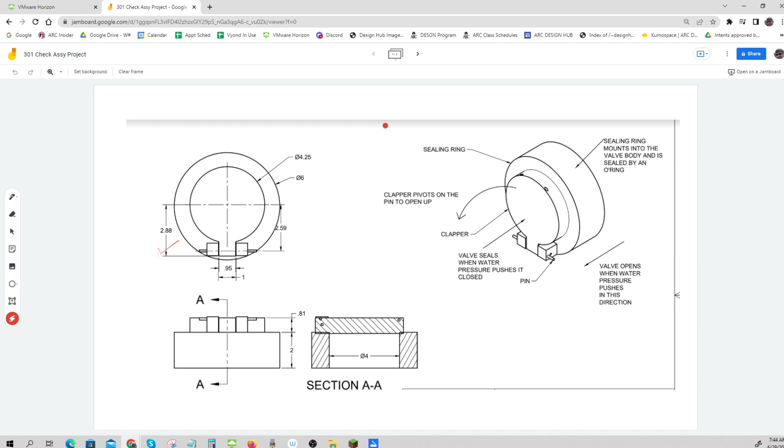And remember, I've got the height, I've got the diameter, I have how wide the rectangle is, how far it extends. So I'm going to use this information to make my drawing. So here we are. I'm all set up correctly, and I need to make a layer called clapper. So let's do that.

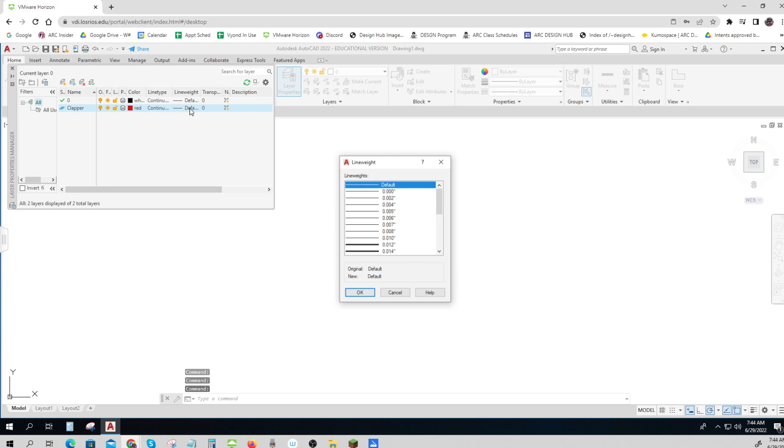Clapper says it's red and 0.014. So I've done all my work. Remember, to get these to show up in inches, I had to right click on my line weights, click on the settings, and make sure it says inches. So now I'm ready to draw my clapper.

Now it could be, let me go ahead and get a few more things that might be useful. Let me go find my mechanical exemplar. There we go. And now I can come back to my drawing and

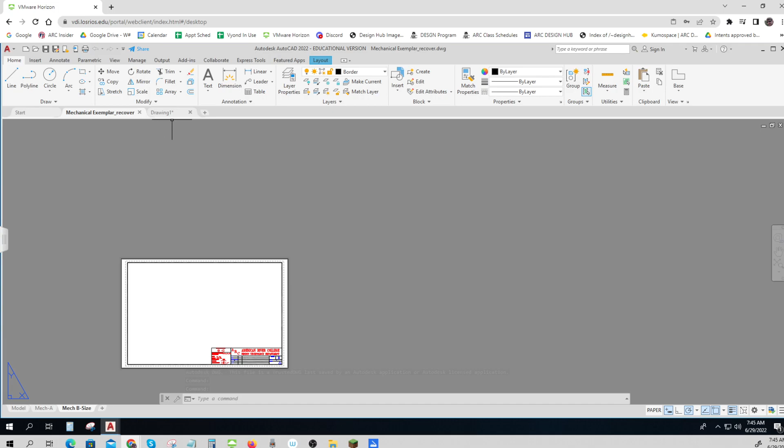probably need to save this now as clapper 4-inch. File, save as, clapper 4-inch. That's going to be in my week 5 stuff, mechanical, clapper 4-inch. And I did a 3D model of it, so I'm going to call this my 2D model.

Okay. So I remember that from the design center, if I look at my open drawings from my exemplar, I can get some other layers. And I probably want center lines, construction lines, Defpoints. Let me just get the whole thing. It's not going to hurt me at all to bring all of those in. Now I have them all available for me to draw with. That's why we use that thing. They're all right there. All of the layers are there for me.

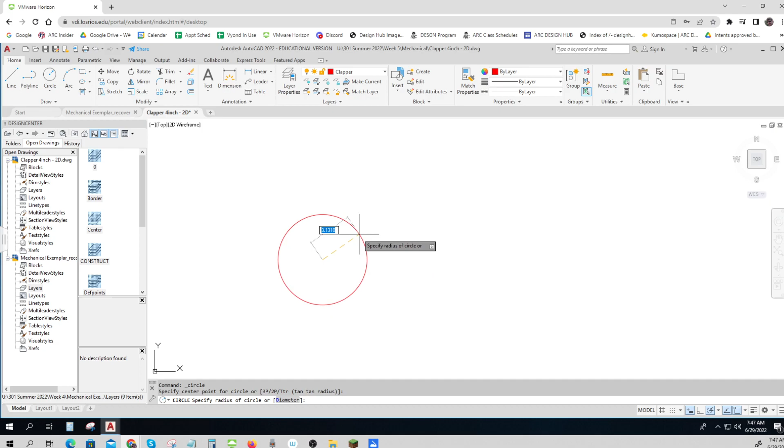So I also have my clapper, and let me start out. The main diameter is 4.25. 4.25. And then there's a rectangle of some size that's 0.95 wide, and I'm just going to make it fairly long. I'll make it like 2 long and see if that will go into place.

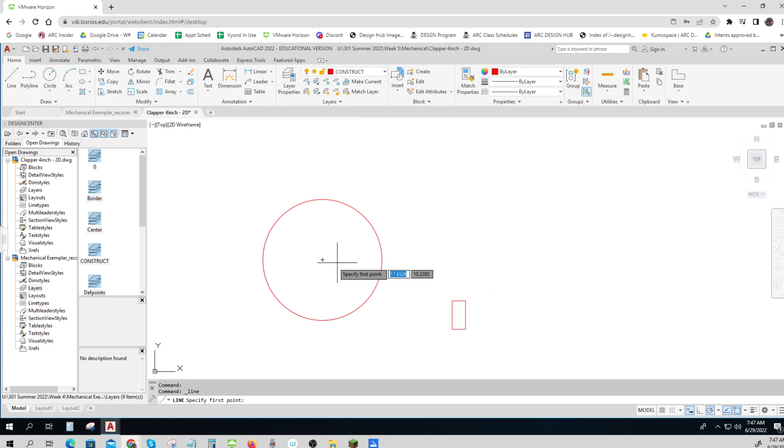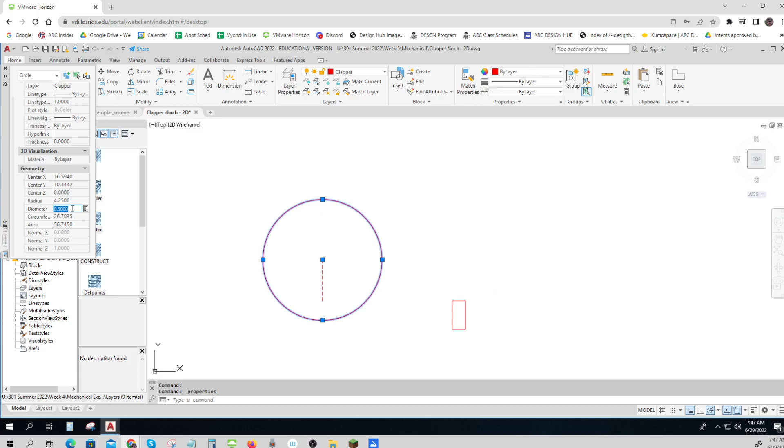Now, to get it into place, I'm going to draw a construction line from the center, and it says the end of the clapper goes 2.88 from there up, and looks like I got that wrong. Let's look at my properties. Oops, I do that all the time. You probably do too. I've got a radius of 4.25. If you get it wrong, you can just click on diameter and write 4.25. That's the beauty of checking things out and doing them in AutoCAD.

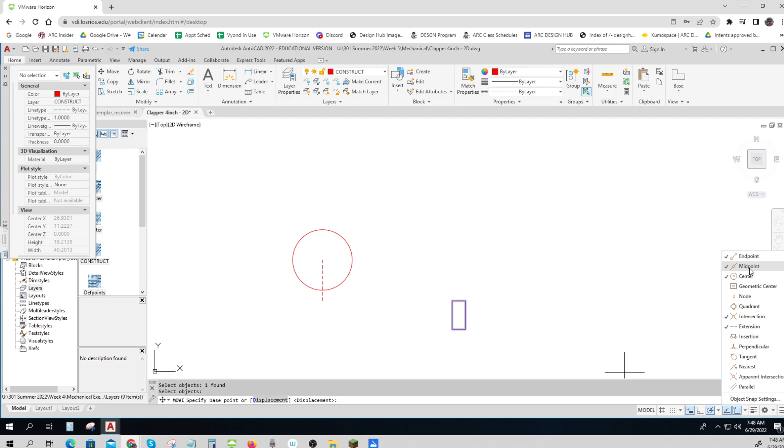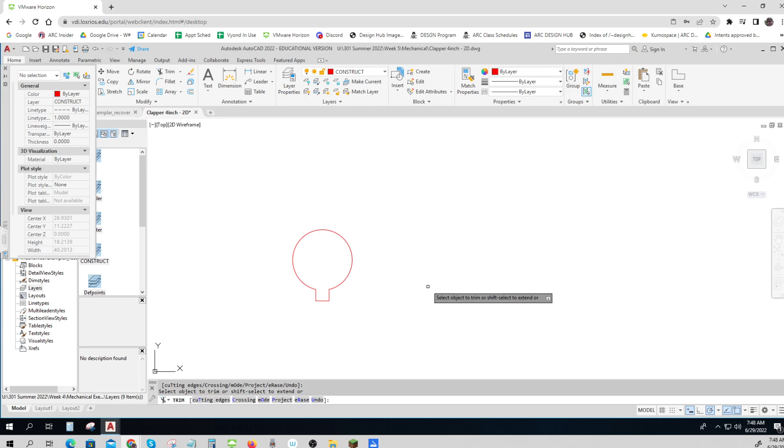Okay, so again, I selected it, right-clicked, properties, and then I can see what the diameter or the circumference or anything is of what I drew, and I saw that I had made the wrong thing. So now I can move, and I probably need midpoints selected, and maybe even, well, let's just start with midpoints. Midpoint of that goes to the end, and now we need to just do some trimming. And that's the basics of it.

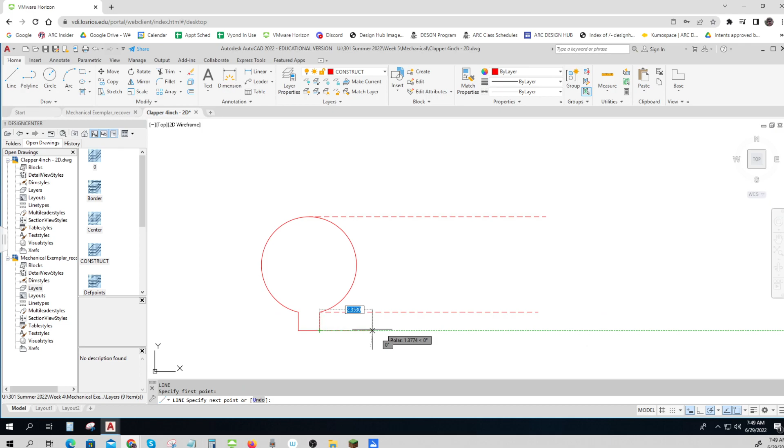Now there's a little hole over here, so I need to do a side view of it. That's what I like construction lines for. So now I can find some important points and project them over with my construction lines. And I know that the top of the clapper starts up here somewhere and extends that whole length. That's the top of the clapper. And it's 0.81 tall, so I can do the offset command. I just did the typing version of it, 0.81.

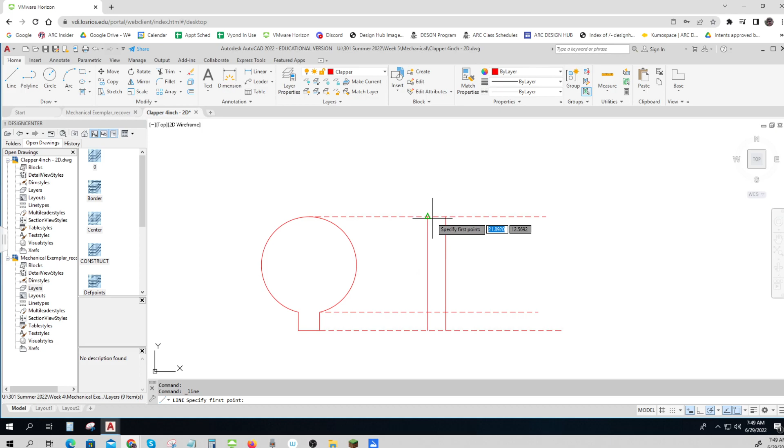And now I can draw in my lines that I see. Now I'm going to do a little trick, why I like layers. I might want to see these construction lines later on, so I'm going to turn them off. There it goes. I've got it.

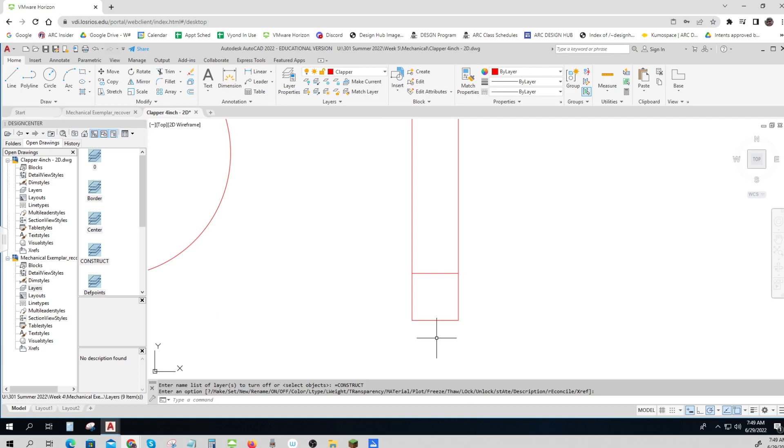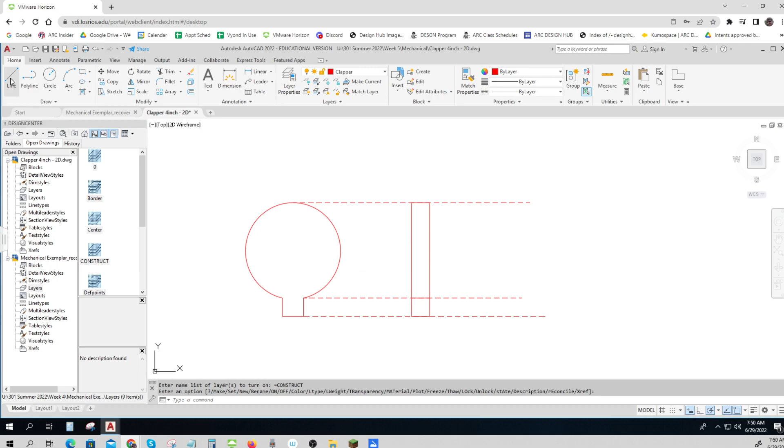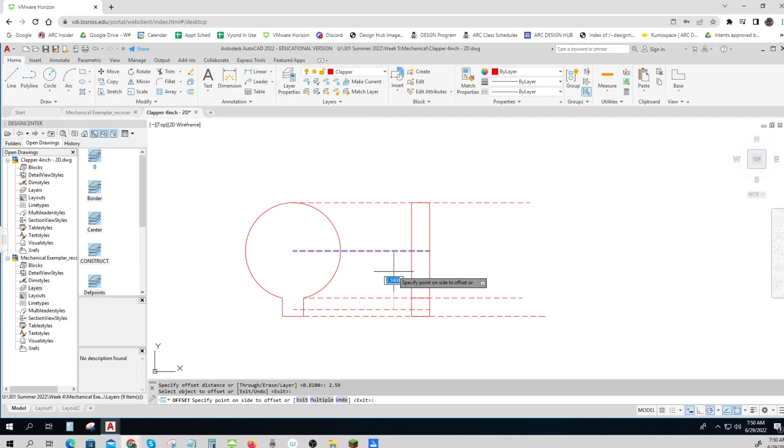And now it just says, well, find a spot for the circle, except it has to be 2.59 away. So let me come from the center. Let me put one more construction line for the center of this thing. And the center, of course, has to line up. And that should have been a construction line. So if I offset that 2.59, I know that it will be in the right place. And then I can just draw my circle somewhere on that.

So I'm on my clapper. Let me put in my circle. I'm going to go up 0.6, maybe. So watch how I do that. I'm going to draw a circle, maybe with a diameter D of 0.125. That's an 1/8 inch diameter. And I can move it from here, and I can move it up 0.6.

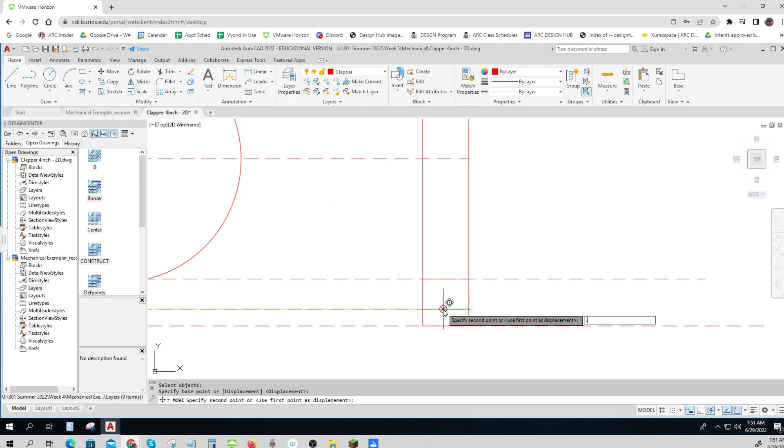0.618. You'll wonder why I took that. And I'll turn that off. There we go. And that's really it right there. Now, there's a few things. I've got everything that I need here to be able to do my drawing. It's ready. That's all it takes to draw that. It's not too much right now.

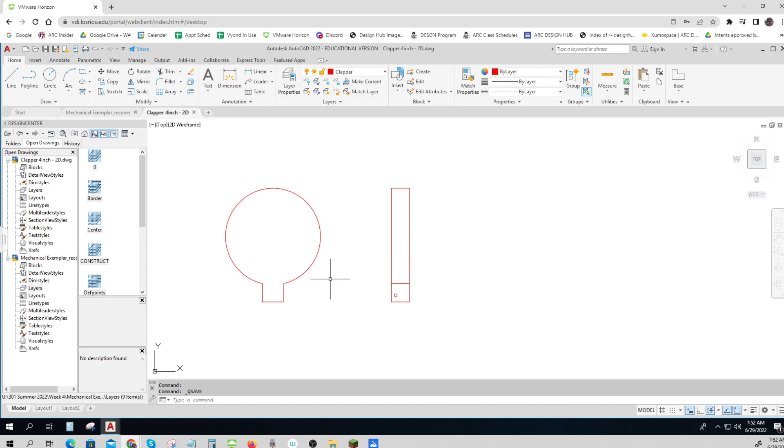So let's see what it says to do on my thing. I'll save my file. Oh, and then it says create a mechanical detailed drawing. So I need a drawing. Now, I think that's going to fit on a B-size drawing the best. Although it could fit on an A size, I really don't know. Let's see how well it fits on an A size.

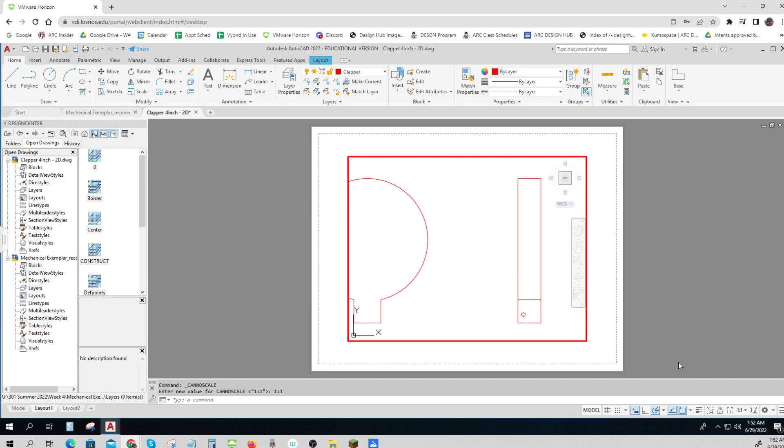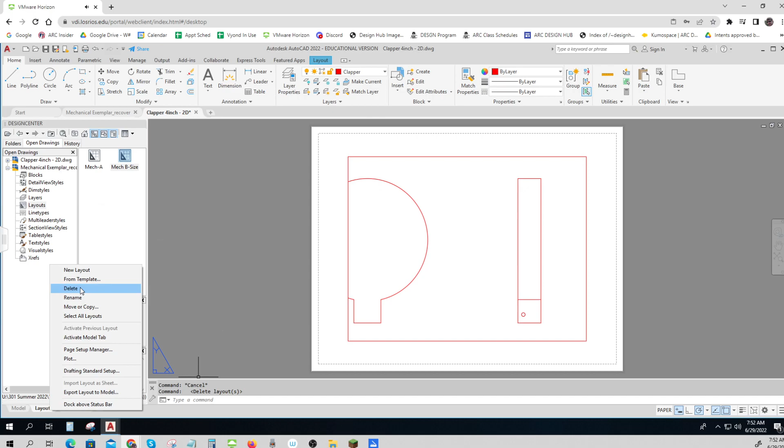If I click over here and make it 1:1, that's going to take up an awful lot of room, even if I move those together, and I won't have very much room for other information. So I like the B size drawing. How do I get that? Remember, I go to my layouts and I bring in a mechanical B size and I get rid of my other two. There's my mechanical B size.

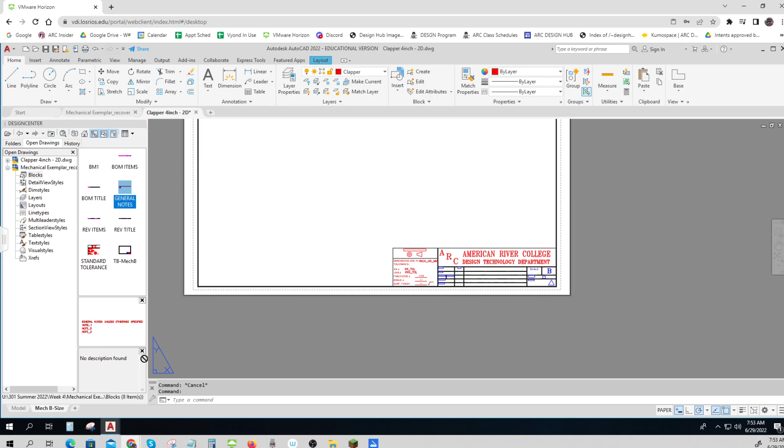And then I'm just kind of remembering stuff. This one already has a title block. It's already got the standard tolerances. So I need some general notes. I know these ones may or may not go with this perfectly. Can always change it later on. And I didn't do a very good job there. I need to get this kind of moved down here.

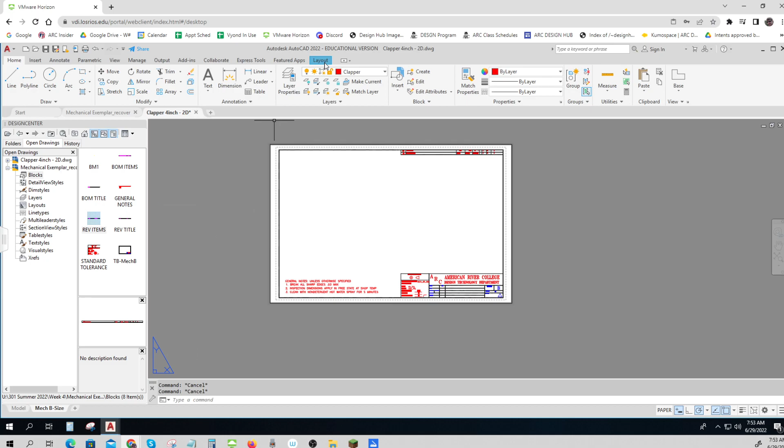And I need my revision. Now watch, I'm going to do my revision title and my revision items. Now I'm really getting down to it. And I'm not going to worry about what those say. And I'll select my def points, go to my layout, and put in a rectangular viewport. And I'll set that viewport as 1:1.

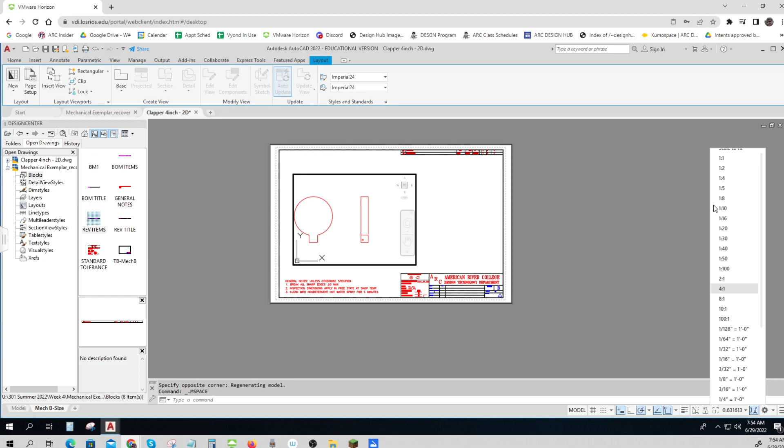My viewport might not be drawn big enough. Let's see. It is. Let me show you a trick. If it wasn't drawn big enough, I go back to my paper and I can pick it and I can actually make it bigger. There we go.

Now I need my dimensions. I'm going to ask you to do mechanical 3 places. Let's bring in mechanical 3 places and go to my home. Make sure that I'm going to use my dim text or my text. I'll leave it up to you. Dim text layer. And remember, I have to go to this tiny little annotation button, go to the dimensions, and make sure that I'm using the right dim style so that it comes out correctly.

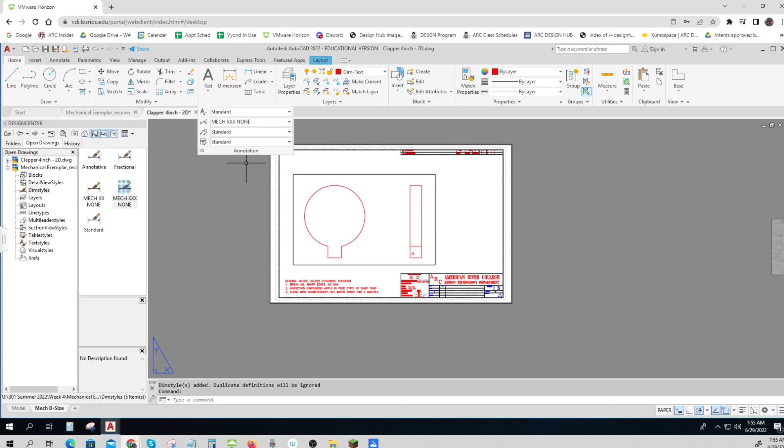First thing I'll do is put in my diameter and hope I've got it right. I do. Now there's some things about this. Put it in about the same place I am. From straight up to 15 degrees should be avoided. From straight over to 15 degrees should be avoided. You want it kind of somewhere in this range right there.

Okay. Now I'm going to do another thing. I'm going to center mark this. So that's under annotate, center mark, and it puts a big center mark on it, which is what I want. That's really kind of cool.

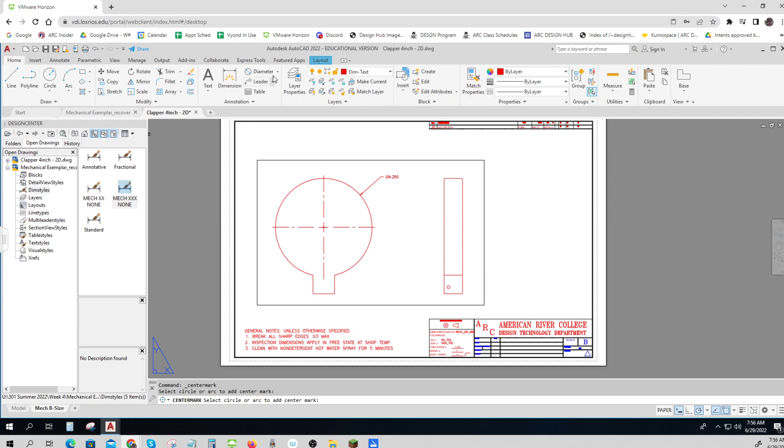Okay, then I have a couple of other dimensions that I'm going to ask you to put on. I'm going to ask you to put on this width. I need another center mark. Sorry about that. There we go. And you can do your dimensions from here too. You can do all your dimensions from here. I prefer to work on my home screen because everything's there.

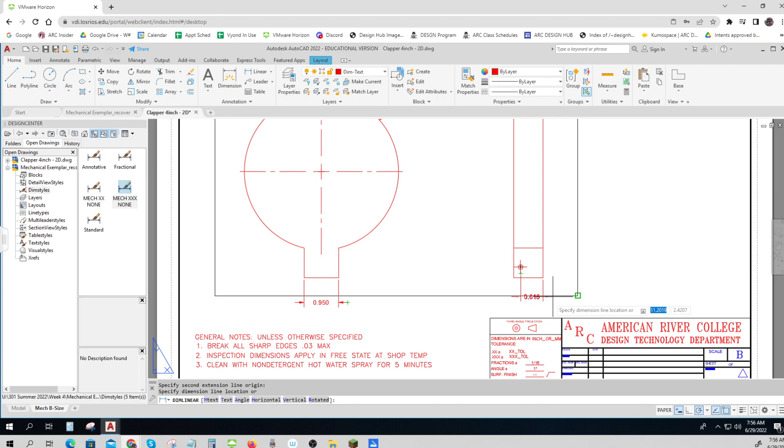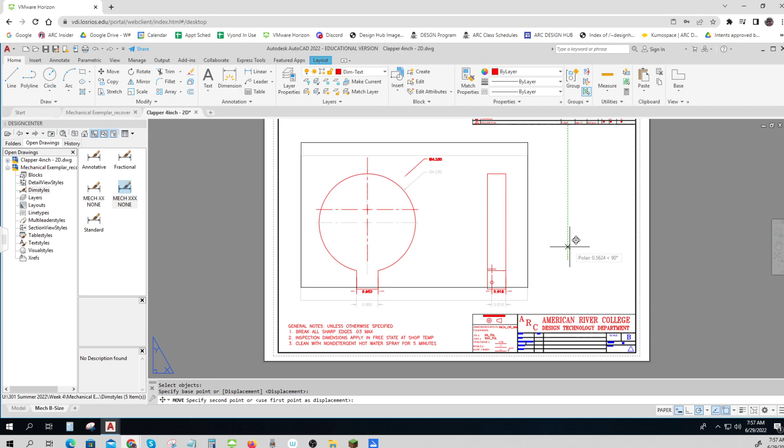That should line up. See how I get it in place? And then I move over to tell it where it should actually be sitting. And I see that I'm going to run out of room down here. So, believe it or not, I can move all of that, enter, and move it all up together a little bit. Now remember, this black line is not going to show up because it's Defpoints when it plots.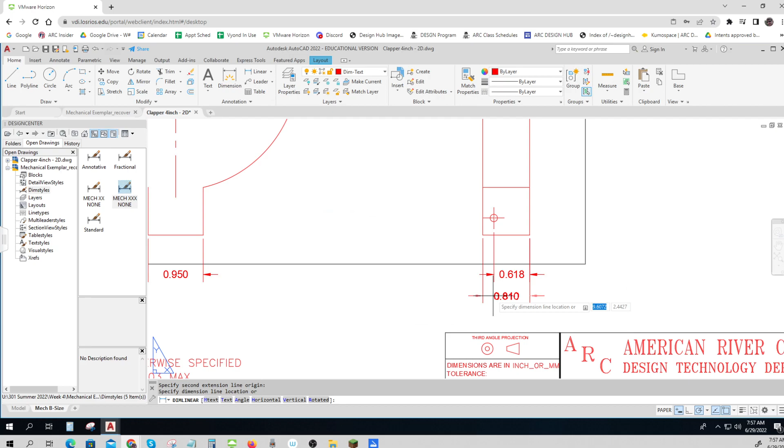So I've got one more here to do. Now that doesn't look very good with the crossing arrows. Okay, it just doesn't look that good. So I'm going to choose to put that one on the top. And then I'm going to choose to get this one to line up with that. Just nice looking when things line up well.

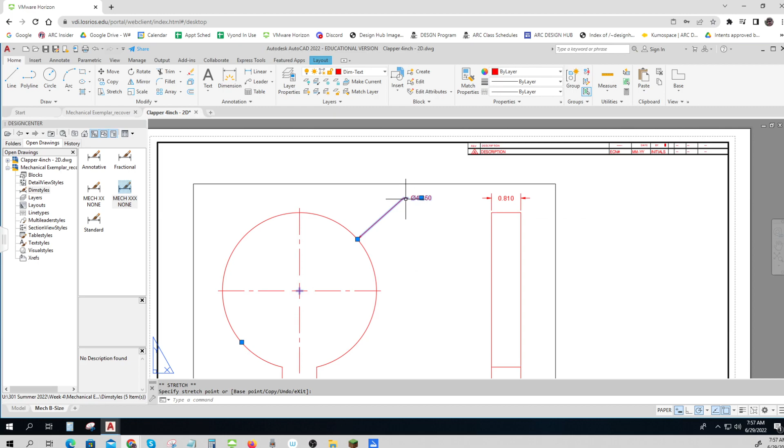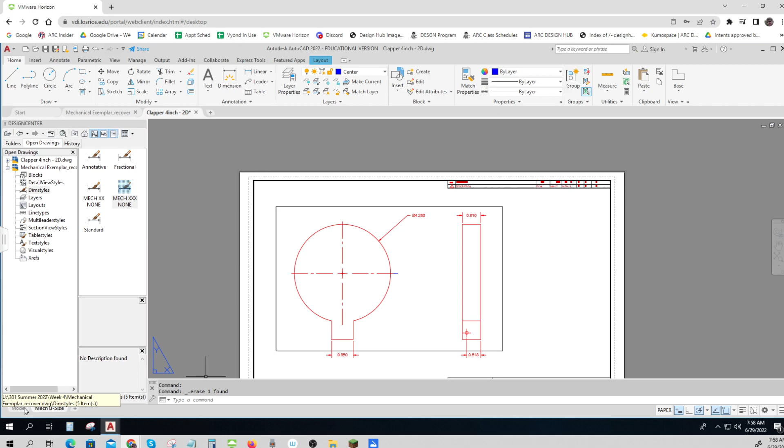Now there's one other thing. I need a center line right here to show where that center line is. So let me put on my center lines and I'll draw a line straight over. And then I'll trim it. Oops. Now, here's the thing. That center line can go in either model space or it can go in paper space. I'm going to choose for this one to put it in model space. There's reasons to do either one.

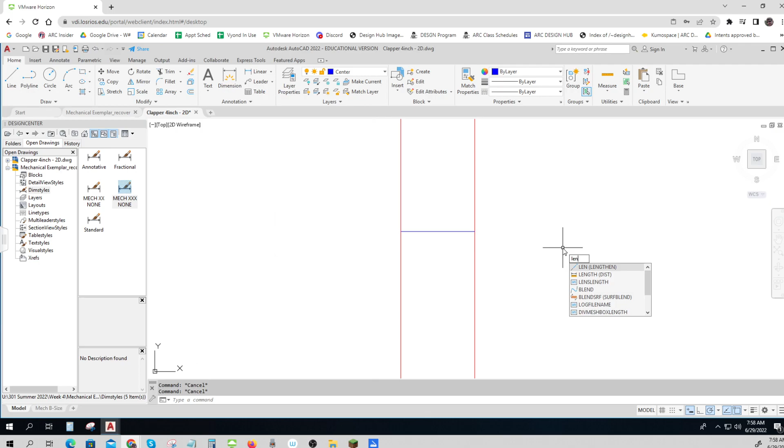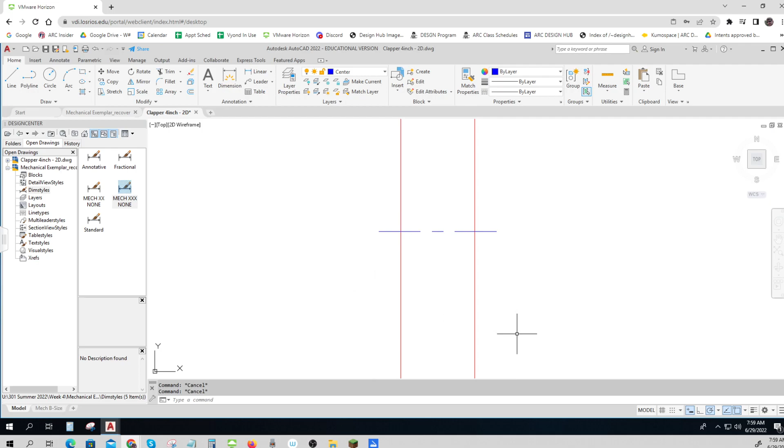Then I'm going to show you another cool command. That should stick out 1/8 of an inch. LEN for lengthen. DE, delta, a given amount, 0.12. And it doesn't really come up showing like a center line. So I need to make it just a little bit longer. Oops. LEN, lengthen. I'm not typing very well. Delta, 1/8. And now it's showing up. I like to have it a little less sticking out, but I'd rather have that show.

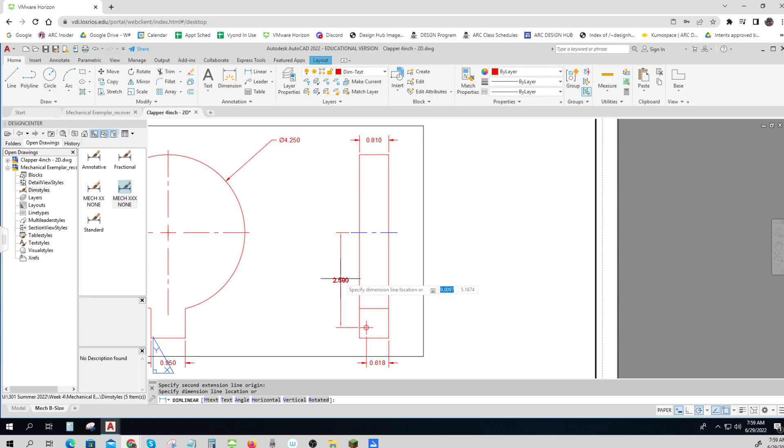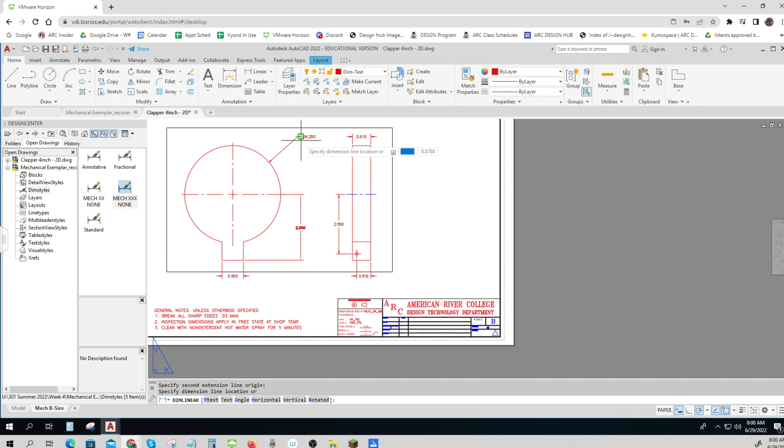And then I need another dimension from that center line to that endpoint. And then remember there was one from this center line. I'm going to use the quadrant of the circle to the end right here. Those were the two dimensions that were given to me. And I'm going to try to line it up right there and then try to move it over so that it starts right about there. Now things are nicely lined up. That's how you would get those.

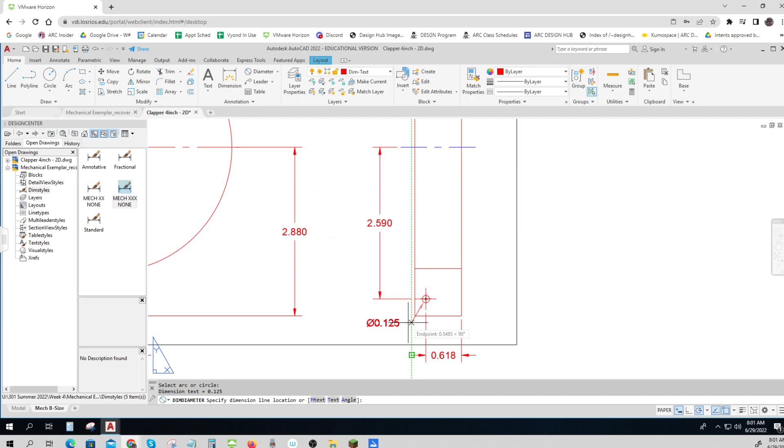And now I need a diameter of that hole. I can bring that down. I don't want it going right through the corner. I need it to miss the corner a little bit. So that looks pretty good. It looks like it's lined up right below that other one. I either need it to line up with this one or this one to make it look nice. There we go. So that's my dimensioning.

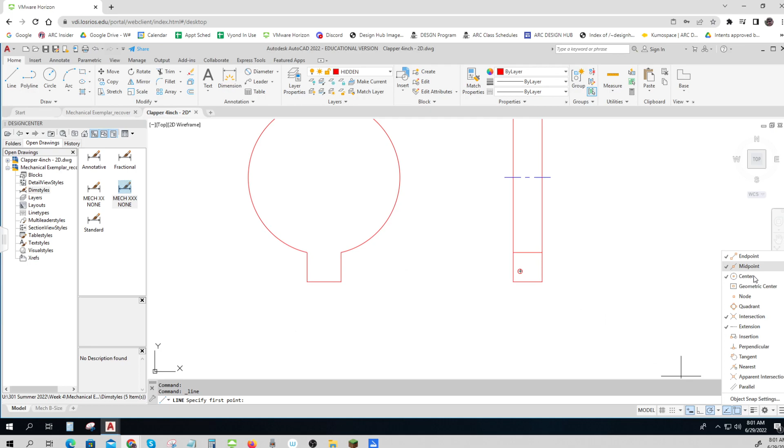Now there's one other thing. I'm not seeing that there's this hole represented over here. And we do that with hidden lines. And they project. Remember, they project. I'm going to turn on my quadrants. Right? They have to line up. Things line up in neighboring views. That's how easy that goes.

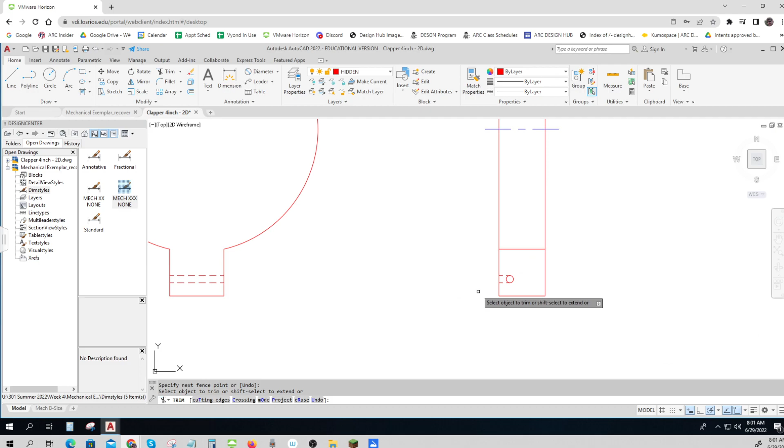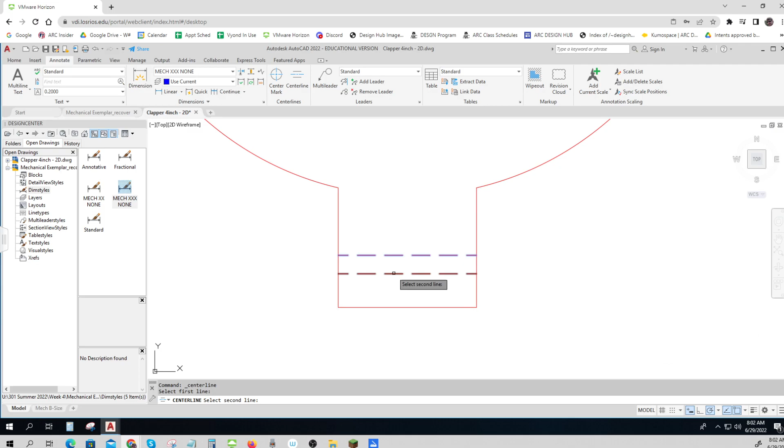I can do another really cool thing here with my center line. That was over here. I can say a center line between those two. And see how it automatically does that nice little extension and everything for me? That is really nice. Now I think I have a full, complete drawing. Okay. I'm missing a few little things that you could add on if you want, but this is a pretty nice drawing, so I'll save it.

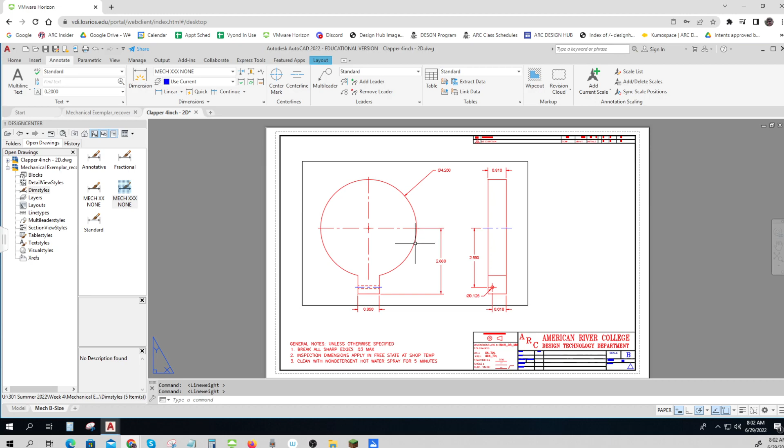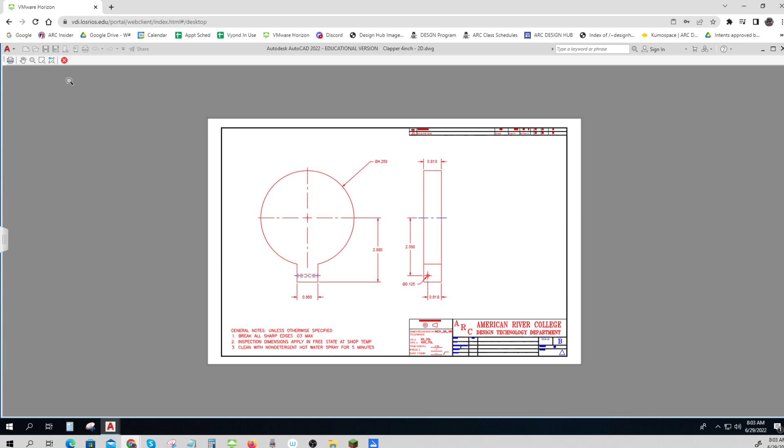Yeah, it looks like with my line weights turned on. Okay. And I asked for my clapper to be a little bit light. We may come back and change those later on, but you've done everything exactly like it was asked for. I can do a print preview. And that is what it looks like. So there's your clapper drawing. And I'll do a save and got it.